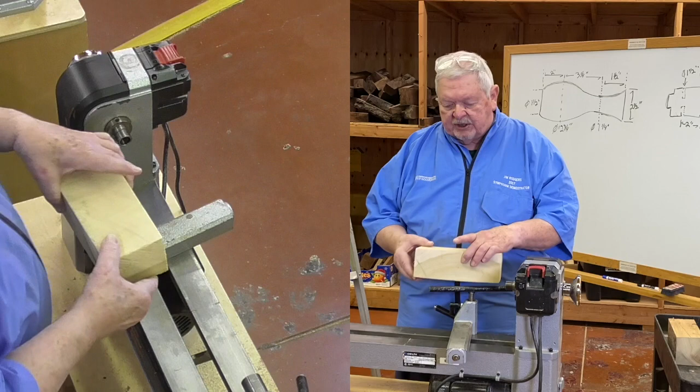I'm going to show you a better way of using the 4-jaw scroll chuck to mount and hold a larger piece of wood. First thing I did was try to select a piece of wood appropriate for the project, so I went to the back of the manual and found the size and shape.

This is roughly the size and shape, but the difficulty is the grain in this piece of wood is going this way, and I want something whose fibers run the length of the wood, the length of the lathe. So that's no good.

One of the first things I need to do is get it up between centers and turn it around. Then we're going to mount it in the 4-jaw scroll chuck.

You've seen me use the center finder to mark the exact center, and I'm going to show you a couple other ways to do that also.

I could just take a straight edge and connect the corners with a line. And that finds the center.

With experience, you can eliminate the tools altogether. If I hold the pencil tight in my hand and draw it along all 4 sides without moving anything, I didn't get quite to the center, but I inscribed a little box. Inside that box is the center. So with practice and experience, there's other ways to find and mark the center.

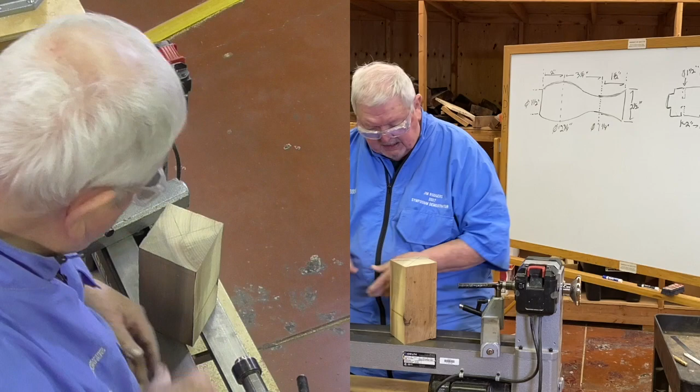I've used my taper cleaner and cleaned out the taper. I'm going to use a 4-prong spur drive in the headstock, and the standard live center in the tailstock, which I've also cleaned. So I'm going to put this up between centers on the dimple.

Get over close, lock it down, and crank into the other dimple, which is right there. Tailstock is tightly locked. And I'm going to keep tightening until when I turn the hand wheel, the wood turns with it. That means the spurs have bit in strongly.

And as yet, because this is really hard wood, it's just beginning to bite in. Pretty good, much better. Wow, nice and tight. So in order to keep this from unwinding, I will tighten and lock the quill lock.

So first thing, turn it around. I'm going to set my tool rest about 1/4 inch away. Looks pretty clear, pretty straight. First tool to use, of course, is our spindle roughing gouge.

I have gone to the sharpener and sharpened every tool in this set right before we turned the cameras on. Now, this is the biggest piece of wood we've had on the lathe so far.

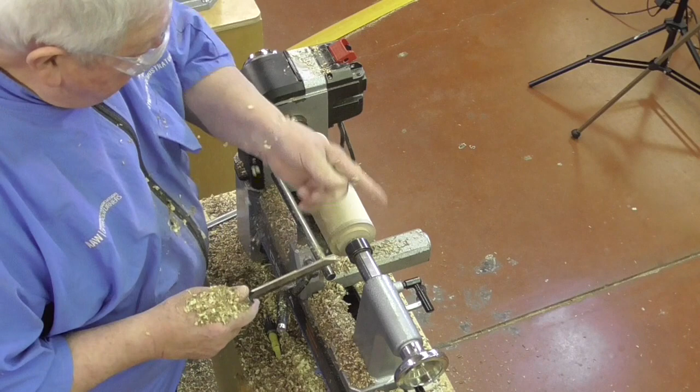Down to the mark, now this way. A little bit more, just a bit more.

So I have it roughed out. I'm going to take my scale and set it here. I'm using this square corner to see if this corner from here to here is perfectly square. It looks doggone good, but let's assume it's not. I'm going to take my skew chisel and come straight in like this, down to that little corner in the bottom, to make sure there's no little rounded area.

And then I want to make sure this plane here is smooth, so I'm going to rotate the skew over, using it again like a scraper.

And it wasn't exact, I had to kind of square it up a little bit. Now the bottom out here is wobbly, but it's not going to touch anything, so it doesn't matter. Now I have this prepared to put it into the 4-jaw scroll chuck, and I've done my first process of almost all spindle work.

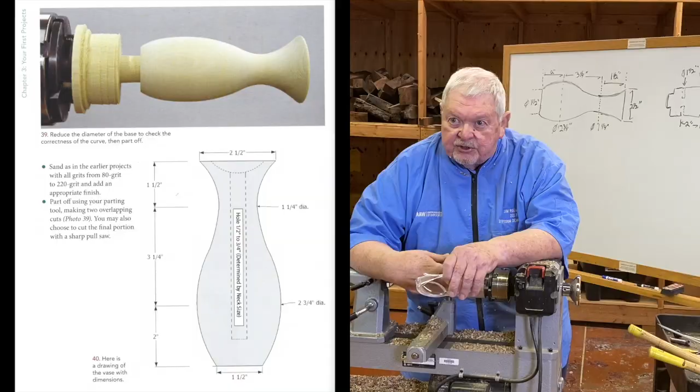So let's go look at the drawing on the wall here and see where we're going. This is the drawing I took out of the book.

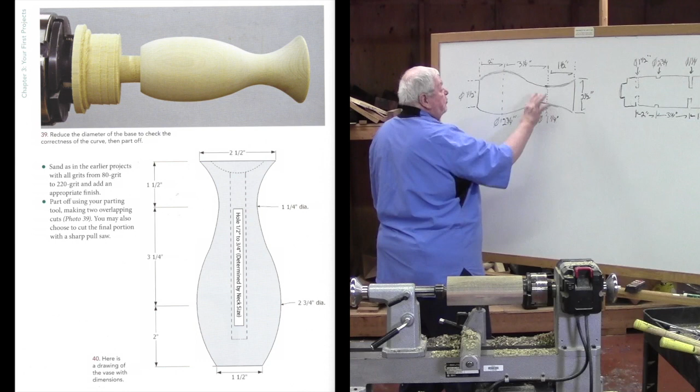It says that the bud vase, well, some dimensions are taken from the front, some are from the tail, and I'm going to have to transfer all those dimensions to the piece of wood. So I know that the diameter of the top is going to be 2.5 inches. 1.5 inches down from there, I go to my narrowest diameter of 1.25 inches, which is the neck. 3.25 inches further down, I go to my largest diameter, which is 2 3/4 diameter. And another 2 inches down is the end of my piece. So I've got to get that information transferred onto that piece of wood.

So when I get the dimensions transferred, this is what it's going to look like.

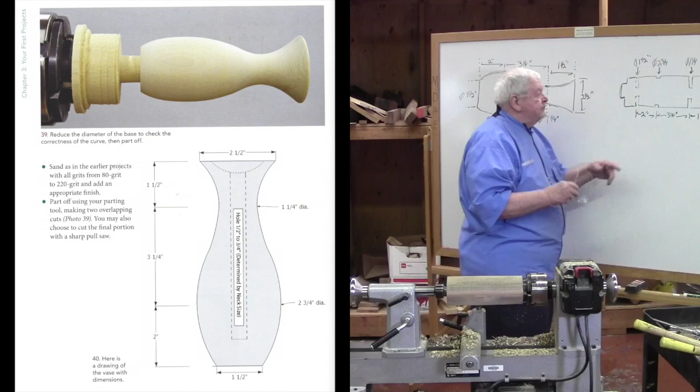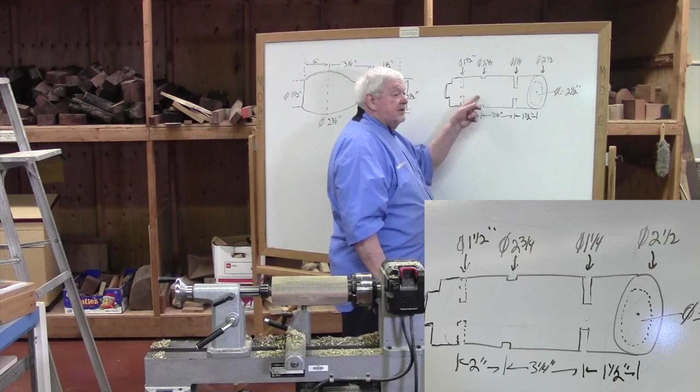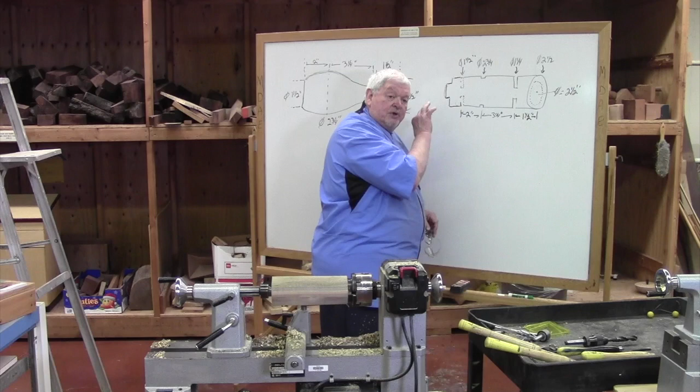On the end, this 2.5 inch diameter, I'm going to transfer a pencil line. Coming down 1.5 inches, I'll use my parting tool and scale to part down to that 1.25 inch diameter I need. Then I'll come down to 3.25 inches and part down to the largest dimension. There's a cut at the bottom I'm not going to make yet. I don't want to cut this down because I want all the support I can get for as long as possible, so I'll just put a little mark there. We'll complete this much later.

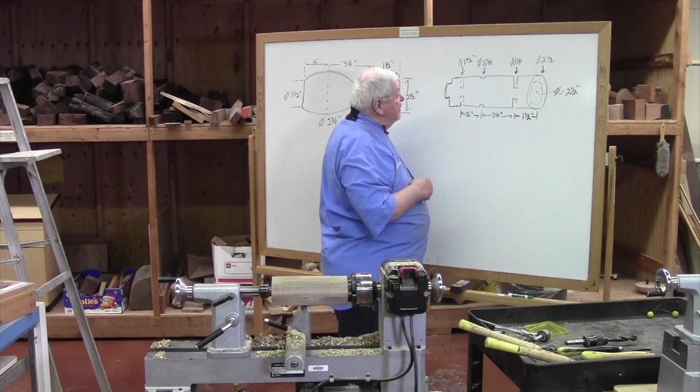So this is about laying out. Now remember, in using our calipers and our parting tool, we need to do a number of different things. We're going to need to transfer the dimensions from a scale.

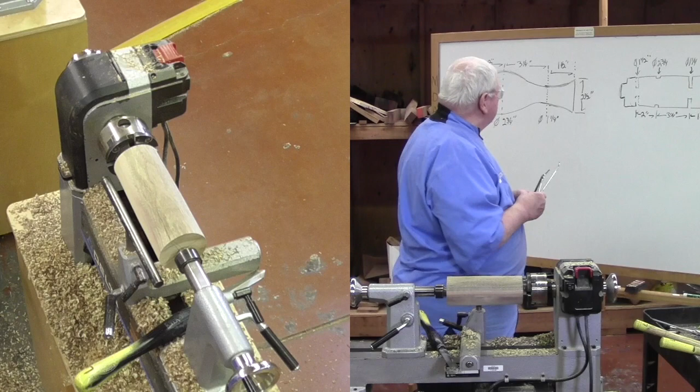The end is 2.5 inches in diameter, so I'm going to crank this down to 2.5. One end is against the end of the scale, the other is on the 2.5 mark. I'm going to leave it just a very small amount proud, because I recognize I'm going to have sanding to do later, and I'll take off a little more wood at that point. So let's take my pencil, come to the end here.

By eye, I'm identifying the 2 3/4, and I'll transfer that mark around like we did for the chuck.

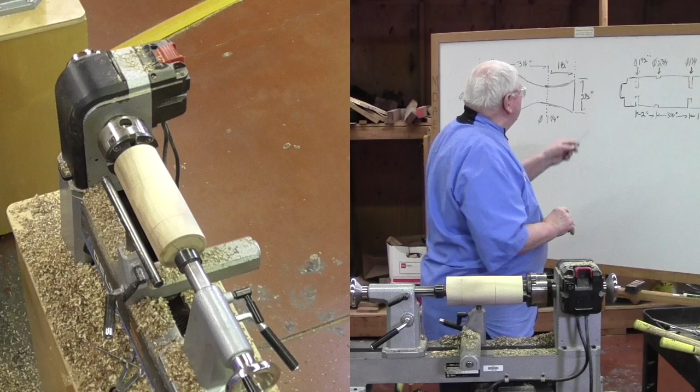Next dimension down is 1.5 inches down. So I'm going to come down 1.5 inches, and I know my mark is going to be put there. The next dimension down is another 3 1/4 inches. 1, 2, 3 1/4, right there. And now I'm going to come down another 2 inches to the base, and that's where my next dimension is going to go. So I know where the pieces are going to get marked.

Now, this diameter should be 1.25 inches. Back to my scale and my calipers. Coming down, coming down, 1.25 inches, climbing. Okay, so that's how small this neck is going to be.

Now, remember in our parting cuts, we take two overlapping cuts. So I need to come down a lot. A little bit, overlap. I don't know how close I am, but let's stop and check. Oh, I got a bunch to go. Overlap.

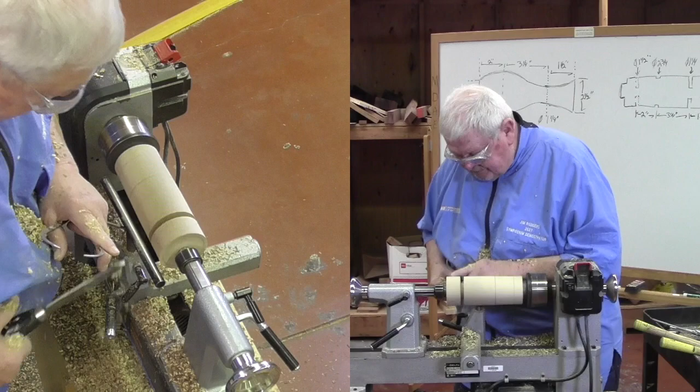Because we've rounded these points off, I can lightly do that. Getting close. Remember, we can also do this. The calipers were just lightly resting on the wood until they slip over.

Done. Next dimension is 2 3/4, and that's going to be at this line. Well, that's too wide. 1, 2, and 3/4 plus a smidge.

So before I take this measurement right here, I'm going to stop and check out a few things and be right back. Okay, we're back. I'm getting ready to turn this one down to dimension here. That's the fattest portion, and the diameter there needs to go to 2 3/4 inch. So I've set my calipers at 2 3/4, and I'm now going to turn this one down.